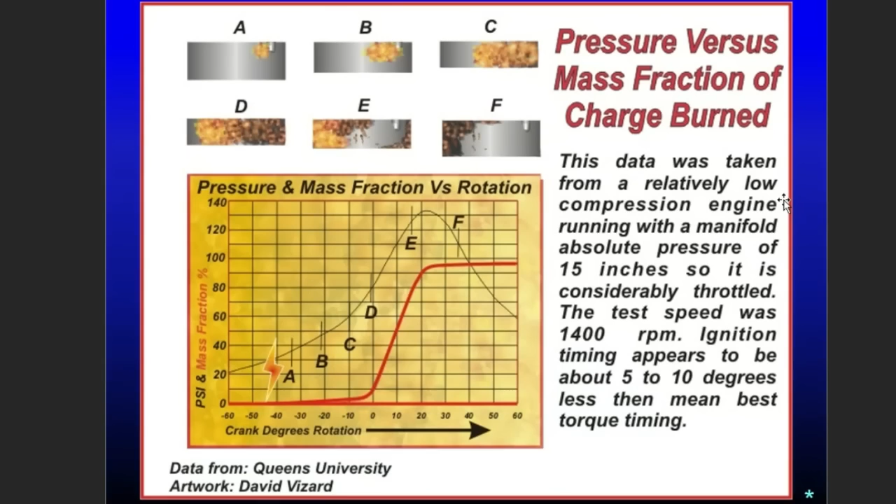Anyway, on to the combustion event. Here's the diagram we're going to be working with. What you're seeing here is a graph of the pressure rise and the amount by mass burned, that's the red line, versus the crank angle, which is along the bottom scale.

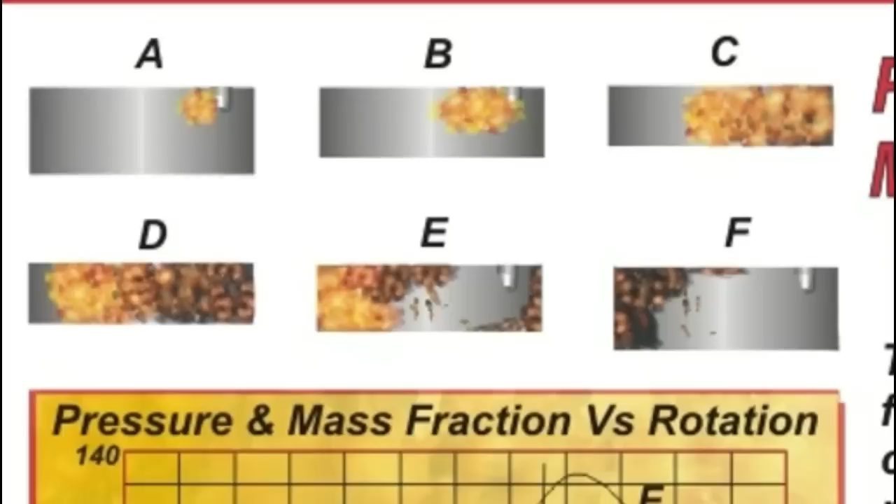The rectangles above the chart represent the combustion chamber at the various points marked on the chart. That is, the piston position will give the chamber shape or volume A, which is positioned on the graph at the point marked A and represents about 35 degrees. Top dead center is going to be around about position D. E follows that and F follows that.

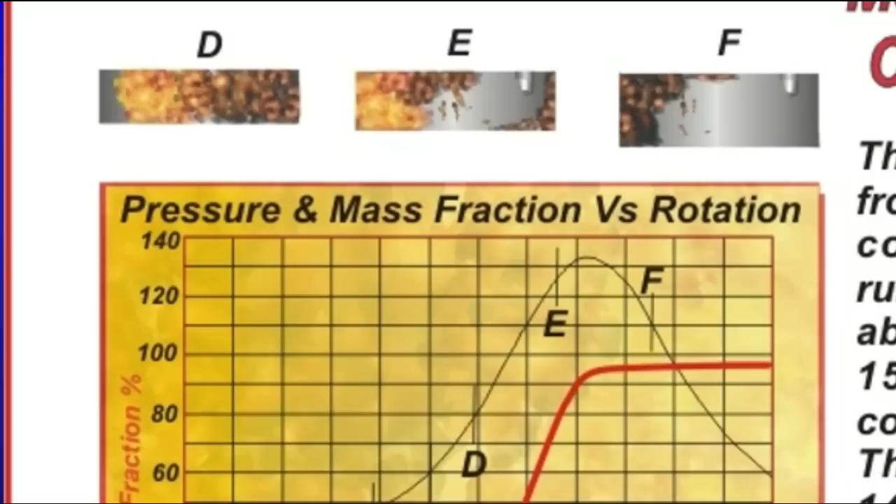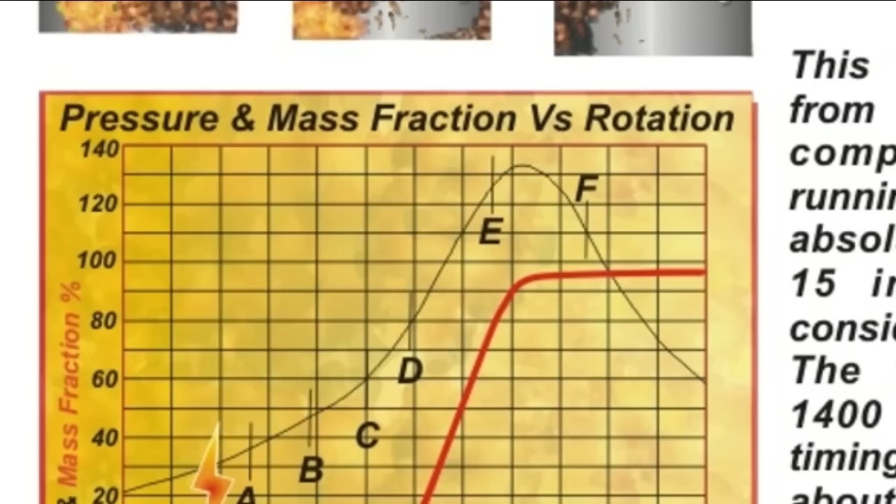Now the part here that's very important is to look at the pressure rise and the mass burnt graph and see how at first they don't seem to make sense. That said, it will make a lot more sense in a moment.

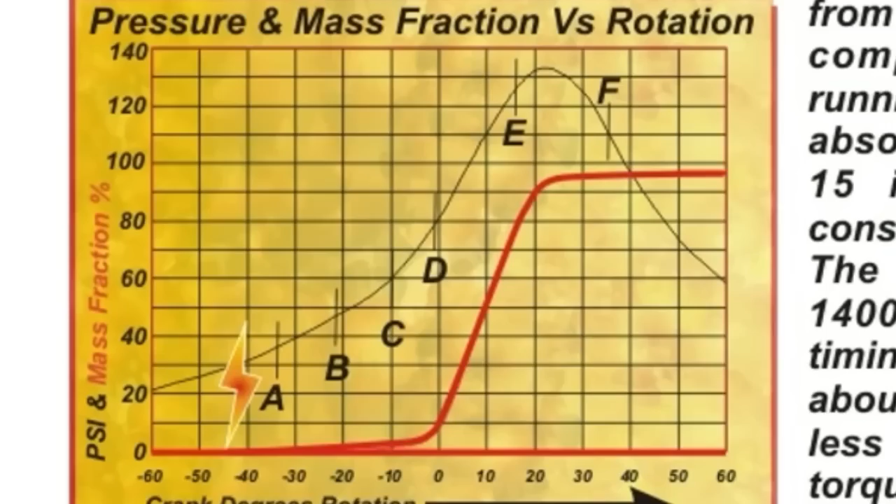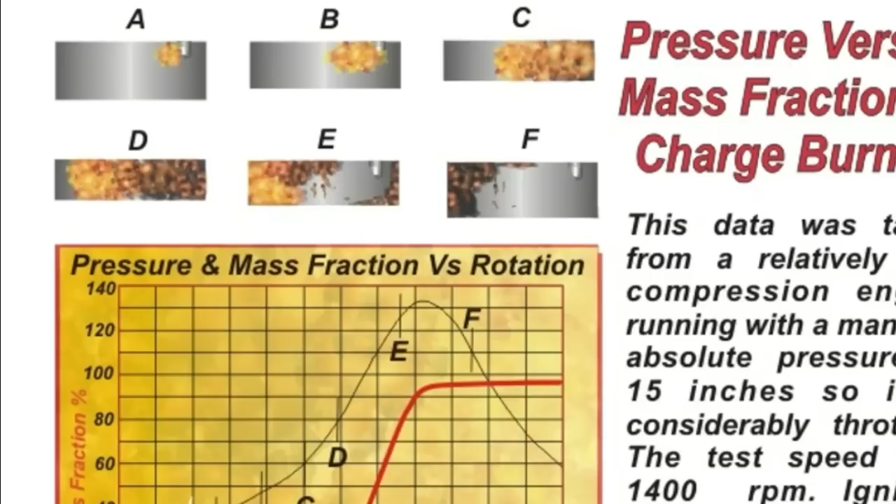First, take a look at combustion chamber C. You'll note that the volume burned looks well over half of what's available. Based on what we see there, it looks like a lot of the charge has been burnt, but that's not the case.

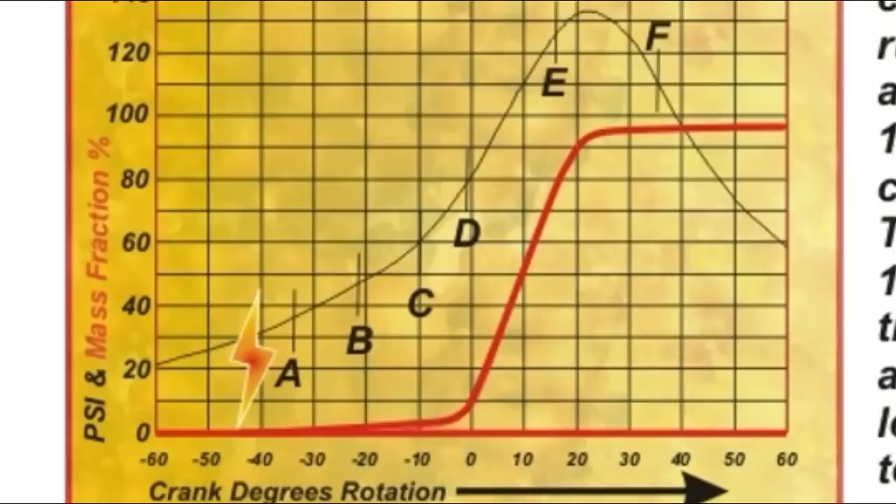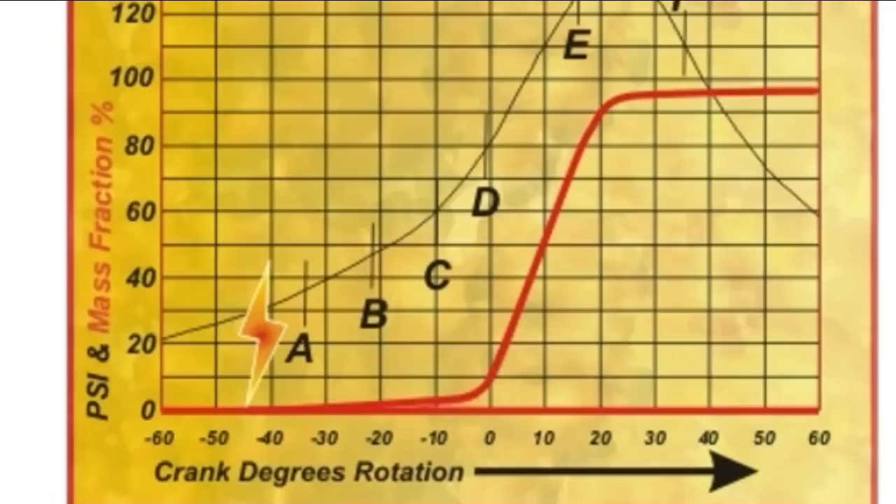Check out point C on the thin line, which is the cylinder pressure, and you'll see that the pressure is rising. But if you check straight down on the bottom of the graph, that would be about 10 degrees before TDC, the combustion volume burned is only a couple of percent at the most. However, in C it looks like it's well over half.

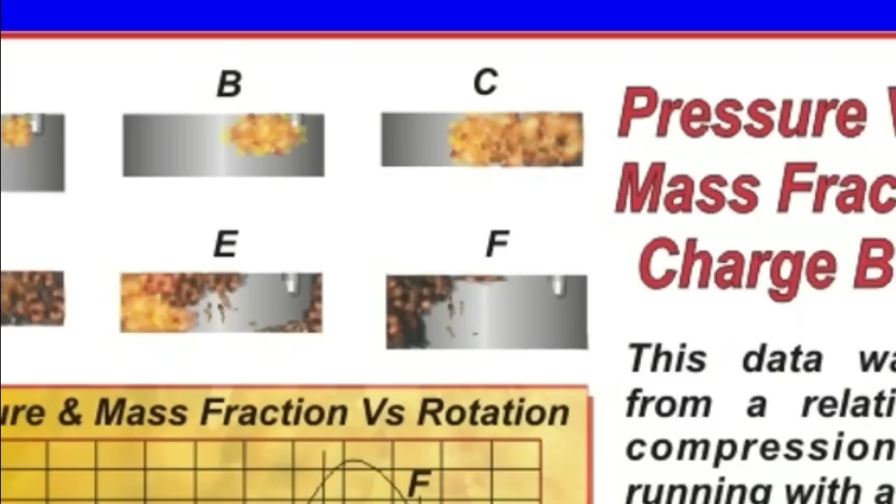Now here's where we get this dilemma. If you look at the mass burned, it's not until we get to point D and then on up to E that the major amount gets consumed by the flame front.

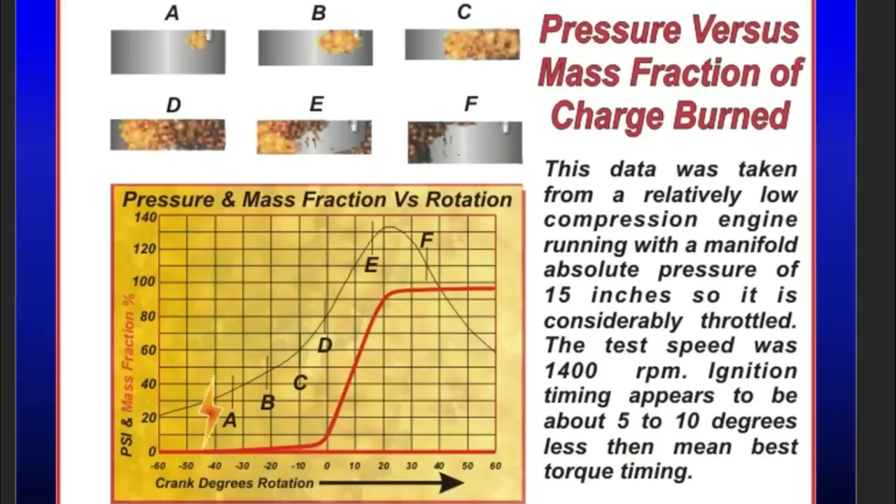Now if you look at D and E combustion chambers, you'll see that the amount that's exhibited burning at D looks far more than the small amount shown by the red line. The red line showing about 10% burned, whereas the picture of what's going on in the cylinder looks like it's about 95% burned. The rising pressure of the burned part of the charge has pushed the unburned part of the charge into a smaller space.

Now if you understood all that, it's going to make a lot of difference in how you'll see the importance of the ringland volume to the combustion process.

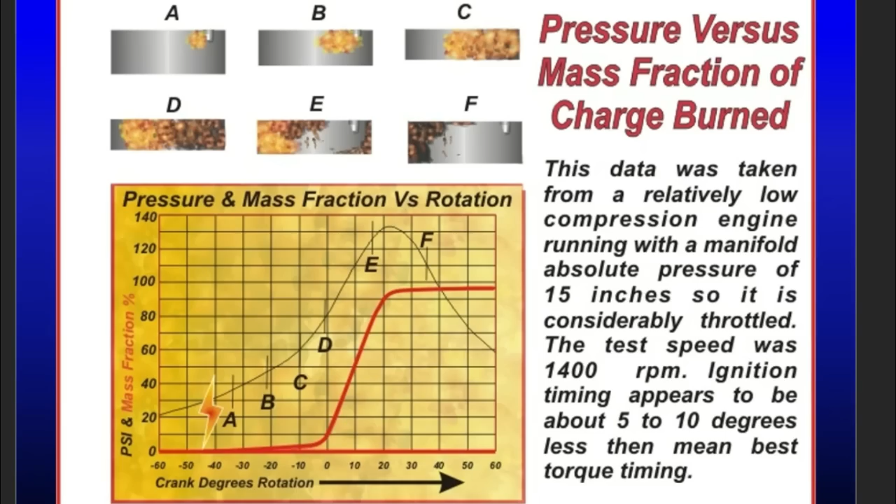So you can see from that chart that the expanding gases push the unburned gases into a smaller space. So what appears to be a large volume burnt is a large volume, but the mass is not much, because now the unburned gases are trapped at high pressure in a smaller space.

How is that relevant? Let's go and look at one of the areas of combustion efficiency that we need to take care of, and that is the top ringland volume.

For those of you who might be unaware, the piston diameter above the top ring is smaller than the diameters that follow on down the piston. That's because the top gets hotter and needs to handle the greater expansion there, and rocking and things like this. But almost all pistons have more clearance there than they actually need.

Now, the further up you put the top ring, the more that volume decreases. When the combustion process starts, the parts of the ringland groove are the farthest they can be from the flame front.

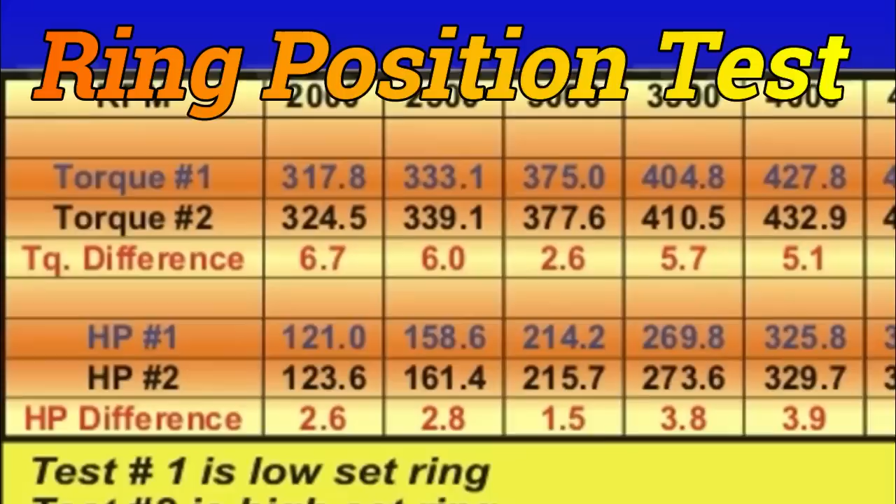If you look at the rows labelled in red, torque difference and horsepower difference, you will quickly see that setting the top ring about 75 thousandths nearer the top of the piston is worth quite a bit of torque and horsepower.

Well, it looks like I had more to say than I thought on this subject, and once again I've reached a time limit here. I know I promised to show you how that difference in that spark plug deal, 10 times more spark value than we started off with in that preliminary picture. What I'm going to do now is show you where we ended up, the before and after, and in the next edition I will show you how to do that really early on in the video so that I can stick to my promise of showing you the actual method of doing it.